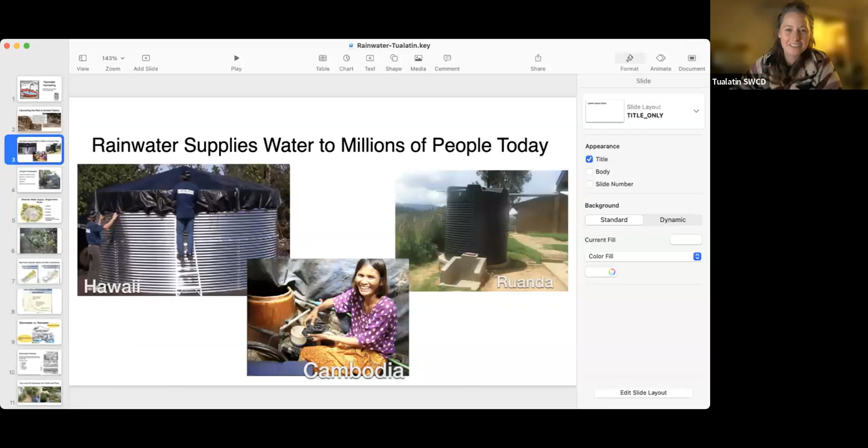I sure can. Great. So thanks for having me and thanks everybody for coming tonight. It's a great night to talk about rainwater harvesting. I can hear the rain outside my window. It's such an amazing resource that we have so much of the year in this climate.

I am a co-founder of Greywater Action. We're a nonprofit and we focus on education, trying to help people transform their homes so our homes can be managing and using all of the water flowing through our homes in a better way so we can have a more sustainable water culture. So I'm happy to talk with you tonight.

Before we start, as you probably know, harvesting rain is nothing new, maybe new to you and your community, but our ancestors all over the world have been harvesting the rain. We've just forgotten about it temporarily for the last couple hundred years. There are thousands-year-old cisterns, even in climates we consider arid, where people did utilize this resource, and especially in wetter climates too. All over the world, you're going to find these old examples of people looking to the rain as a great resource.

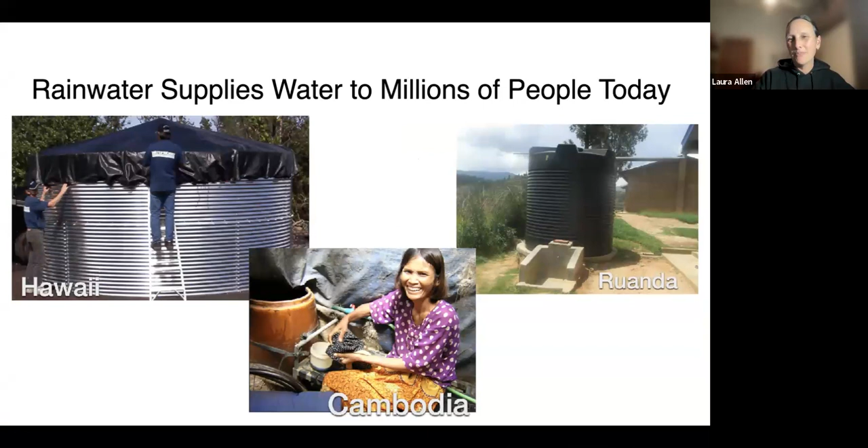Today, it is also a water supply for millions of people around the world. In this country, Hawaii is an example where so many people only have rainwater as their water supply, in addition to other countries around the world. So it's old, it's new, it's still being used today. And we're going to talk about how we can tap into this in our own homes in Oregon.

So tonight, I'm going to talk a little bit about benefits of rainwater harvesting. We're going to talk about stormwater, which is water that's flowing onto streets, and it can be a big pollution problem, but we can transform that problem into a solution. We'll also talk about rain gardens and rainwater catchment systems, going over the different components and the design that you can implement in your own home.

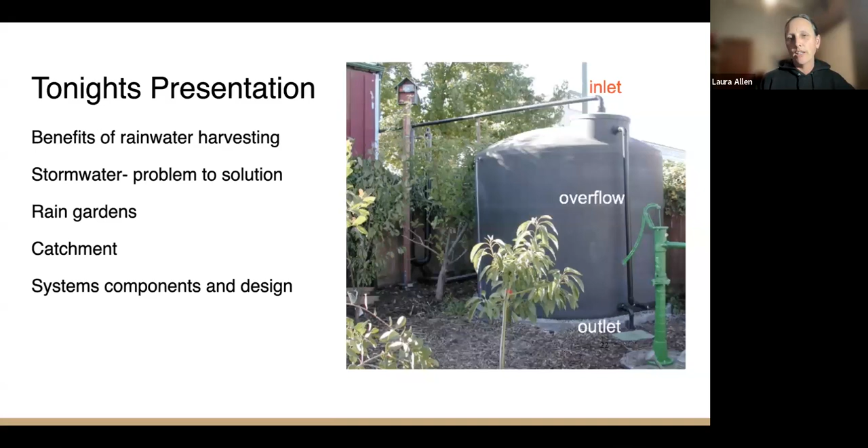Before we get into rainwater, I just want to mention it as one tool in our toolbox of transforming how we use water. It's a great resource, but it's not the only one. There are other water supplies that you may have heard about or may be interested in researching later on.

Or maybe you already use gray water, which is water we've already used in the home that can also be sent outside to be reused. And then there's other waters like black water that contains the toilet water. It's not typically safe to reuse in your own home, but at the community scale, we can recycle that water and use it for another use.

So there are lots of different sources of water that's not just potable tap water, because we have all these ways we use water where we don't actually need to be drinking it. The quality really can match the need we have, be it irrigation, toilet flushing, or other things like washing our clothes.

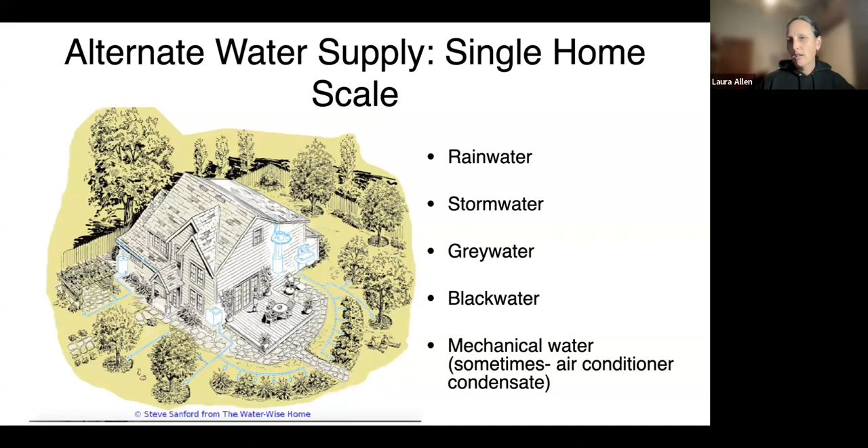And so now we'll get into the rainwater portion. Before we built our cities, when it rained, most of the rainwater soaked into the ground. Our landscapes were very spongy and they soaked up that water, and it slowly went into our creeks and rivers. But when we urbanized, that really changed how water flows through our landscape.

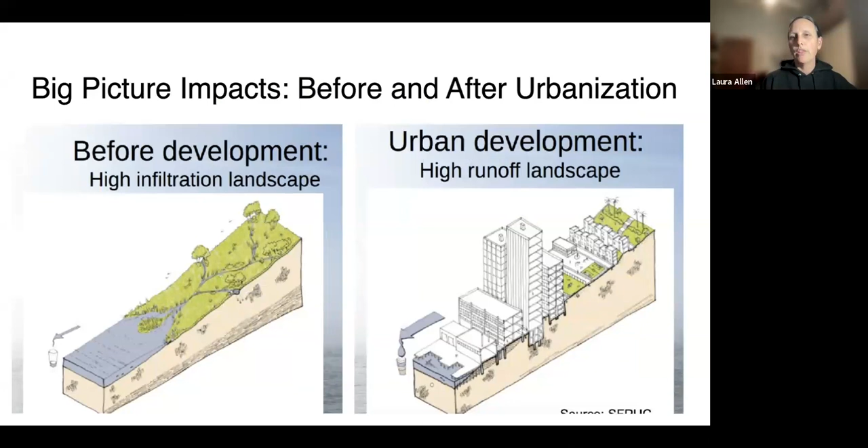When we built roads, buildings, all these things that have what we call hardscape, like anything made out of cement or a surface that doesn't soak in water, that really caused all the rainwater to run off very quickly and take all the pollution with it and send it right into our waterways. And so that was a huge change.

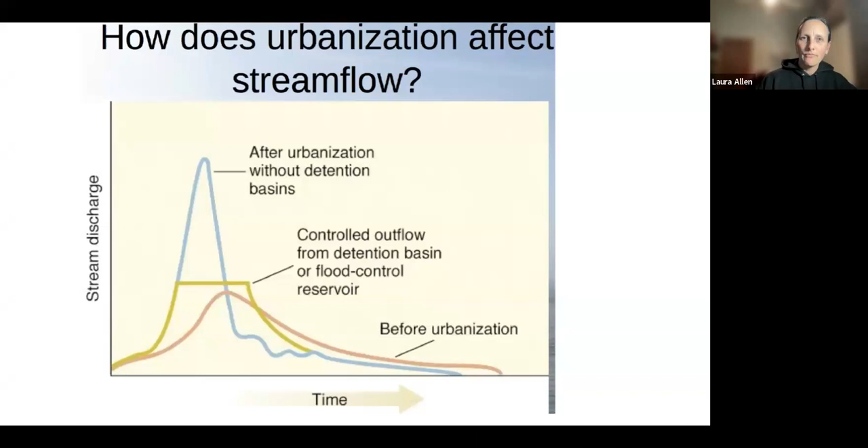Just a couple of terms if you're not familiar: stormwater and rainwater. Really, it's the same thing, water falling from the sky. We use the word stormwater when that water has hit the ground, so the quality and how you can use it is different. Stormwater comes from water running off paths, streets, parking lots, or any ground level surface. Rainwater is what's landed on our roofs that you can intercept before it gets to the ground, getting it out of your gutter or downspout into a container.

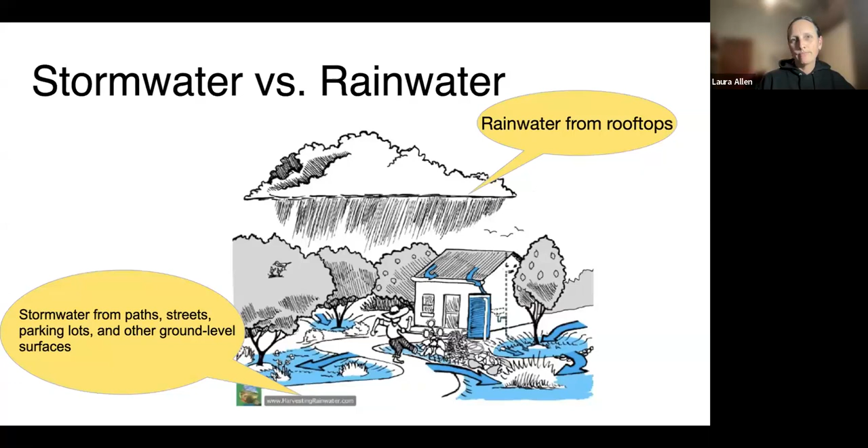Stormwater causes a lot of pollution because it washes our cities clean, washing away all the stuff we've put onto our roads and yards. There's dog poop, pesticides, fertilizers, trash, brake dust, oil slicks from the streets - a whole bunch of stuff that's really not healthy for the aquatic organisms in our waterways. Stormwater is a humongous source of pollution.

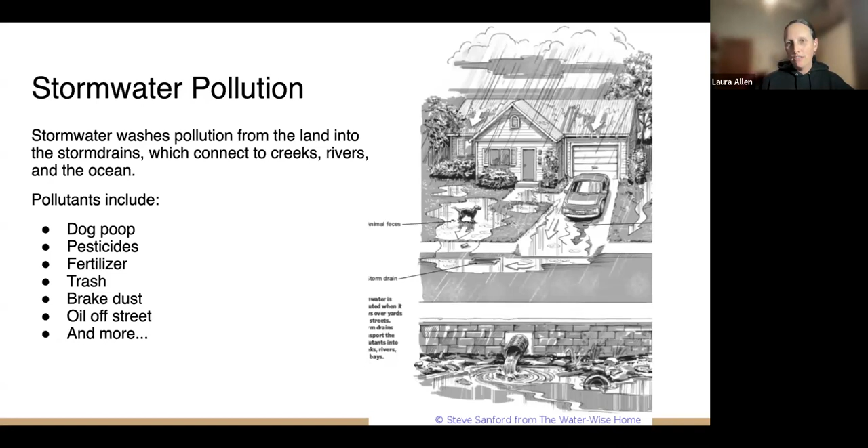So we have this double benefit: we can stop this pollution and get that water to benefit our landscapes. The big picture concept is we want to keep water where it lands, or as close to where it lands as possible. We want to slow down the flow off properties and sink it into our landscapes, starting by thinking about what we're putting on our yards.

These are really simple things you can do. Then we get a bit more involved, actually shaping the land so it's more like a bowl, so it can temporarily soak up more water. Another word for this is passive water harvesting - we're harvesting the water, but we're doing it in the ground.

In this picture, there's a house on the right with a gutter and downspout directing water to a basin, a depression in the land that's a bit lower - like a shallow bowl planted with plants. The rainwater goes there and is stored temporarily as it slowly soaks into the ground. So there's no runoff from that property, and no flooding, because there's a space dedicated to soak up that rainwater.

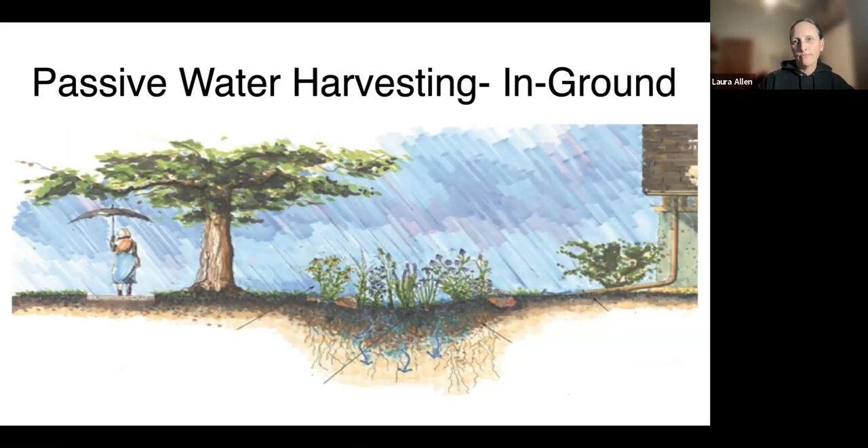We typically call these rain gardens. You've probably seen them, maybe you even have one. They're used in cities all the time now. Nowadays, if there's going to be new developments, rainwater isn't allowed to just run off anymore; you have to manage it somehow. So you'll often see rain gardens incorporated into buildings and all over the place. But if your house is already built, you most likely don't have one unless you've retrofitted your own yard. Think of a rain garden as a nice garden feature, a special planting area for the rain where you grow a lot of nice plants.

When you design a rain garden, you're designing it so it won't need irrigation. A nice benefit is that once your plants are established, you have a whole section of your yard that doesn't need irrigation because it's adapted to thrive with typical rainfall patterns. While you have this lovely landscape feature, you're also managing stormwater, cleaning the water as it flows through plants and soil and infiltrates into the ground. You're also helping your community by keeping water on your property, preventing flooding downstream. If everyone keeps rainwater on their properties, we don't get all that water going into the streets at once, causing flooding issues.

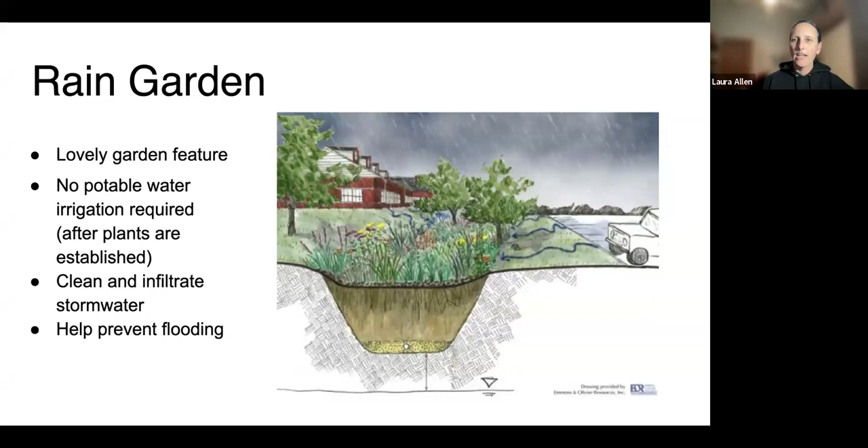Basically, how it works is you direct rainwater from your home using gutters and downspouts to a dedicated planting area. The plants you pick will have deep roots, opening up the soil and allowing infiltration. You have a place for the water to come in and a place to manage the water as it goes out. You've designed this rain garden to manage the water there. If too much water comes in and it can't soak it all up, you've created a way for the extra water to safely leave the rain garden and go somewhere else where it won't cause a problem. It's a thoughtful way of managing some of your rainwater and stormwater in your landscape.

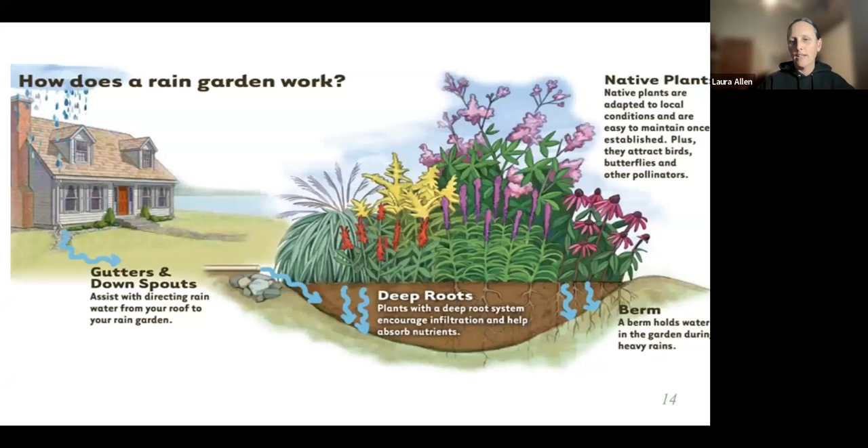The main point of a rain garden is that you're irrigating native plants. If you like to grow native plants, rain gardens are an excellent choice because they're really set up to provide water for them, and they're also preventing stormwater pollution. So you get that double benefit.

Rain gardens can be used at a bigger scale than just a home. This picture is, I believe, in Tucson, from Brad Lancaster's website. He's got some great books about harvesting rainwater, called Rainwater Harvesting for Drylands and Beyond, with a couple of books in his series. In this picture, on the left you see the landscaping being done for this small development, and on the right is the finished landscape. When it's done, you don't even necessarily know you're looking at a rain garden or seeing a way that this landscape manages rainwater. It just looks like a really nice landscape.

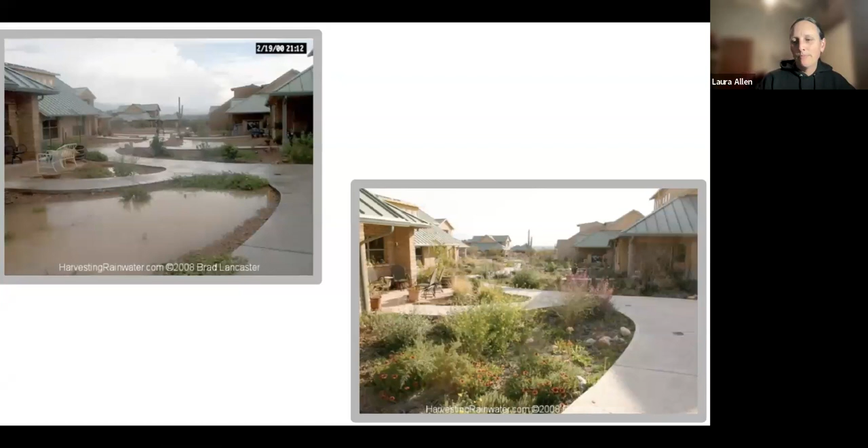Rain gardens are used in parking strips too. If you go around town wherever you live, you're most likely going to see these. They're very common now. Sometimes they aren't the most beautiful when they're in the parking strip or along the street, because cities plant them with really robust, low-maintenance plants, but they can sometimes be very lovely. These are two different pictures from parking lots and residential streets.

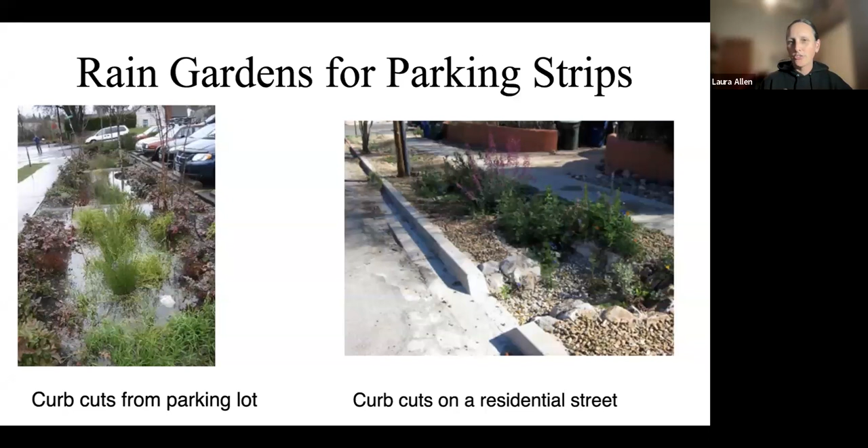At the commercial scale, stormwater isn't just used for irrigation like in rain gardens. Sometimes it's collected, filtered, and used for non-potable uses like toilet flushing. You might see examples like that, and it's a great way for a commercial site to cut back on water use. But at the residential scale, typically it's just sent to a rain garden where you're growing native plants.

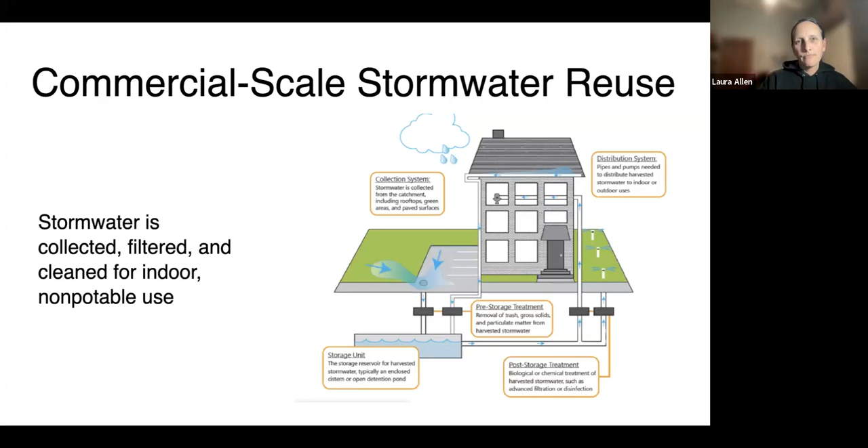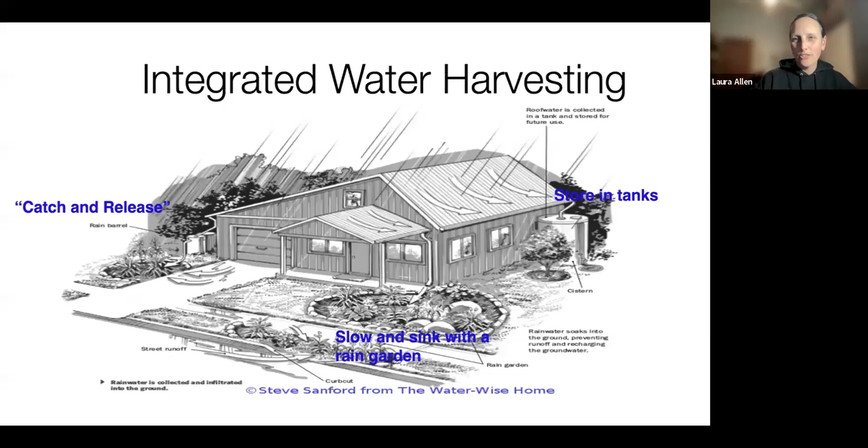So I'm going to move into talking about the storage part of rainwater. You can collect a lot of water. You usually don't have to collect all of the water from your entire roof, depending on the size of your home and access to gutters and downspouts. But you can collect a whole bunch of water. Even in 1 inch of rain on this roof, you can collect about 600 gallons. And we get a lot more than 1 inch of rain, so it's a pretty big amount.

You can store it in a lot of different ways. Barrels are a really common way, like the 55-gallon barrel. This house is showing a couple of different strategies of collecting rainwater. There's a single barrel, it's pretty small, it can go pretty much anywhere. You can paint it to match your home, put it somewhere out of the way. Really, it doesn't add a big footprint, it doesn't take up too much room.

You can also connect barrels together. So in this image, it's showing under that back deck, there are 8 barrels connected together, and that's about 400 gallons of storage capacity. That can be a really nice way to use dead space in your house. Sometimes people have a little strip behind a garage or under a deck, and you can connect these barrels together and get several hundreds of gallons of capacity in a pretty simple way. And usually it's pretty affordable.

Then you can go to a bigger tank, called a cistern or a tank. The image on the left of that house has a 3,000 gallon tank, and that's near the house. It doesn't have to be. I have a 3,000 gallon tank at my house, and it's about maybe 30 feet off the house. So I'll talk a little bit later about how you can position the tank where it's not right next to your house, but that depends on how big your yard is. That could be a giant tank, or maybe that could fit nicely into your landscape, depending on how much room you have.

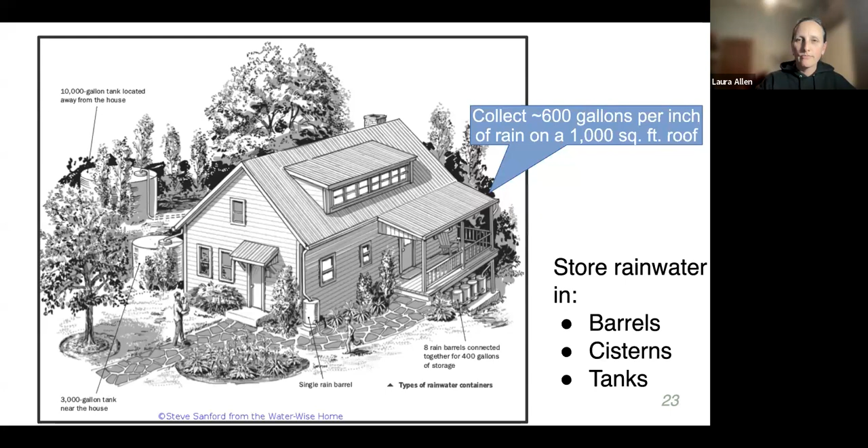So at the residential scale, the common uses for rainwater—usually people start with using it for outdoor irrigation. It can be really simple to do that, call it low tech. You're just collecting the water, you're not going to drink it, so the quality is not super important. You use some basic screens to keep out mosquitoes and keep out leaves and debris, and then you can just send it right into your landscape. It can be gravity flow, really simple.

If you have a bigger system and maybe a bigger yard, you might want to do a drip irrigation system with your rainwater, because it can be time consuming to use up the water if you're out there with the hose. And these rain systems don't have a lot of pressure. So if you imagine hand watering with the hose, it's probably going to take like 2 to 4 times longer if you're using a low pressure situation. So depending on the size of your yard, you might want to streamline that a little bit.

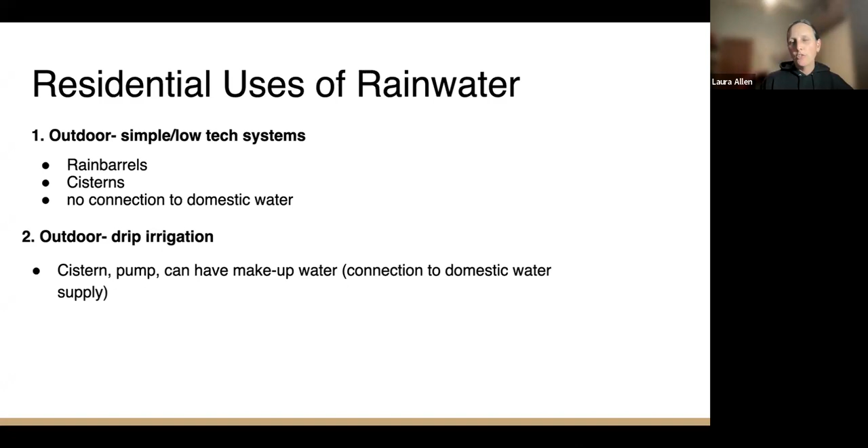So you can set up a drip irrigation system with your rainwater. You can sometimes have it work with gravity if your setup allows for that. Oftentimes you might need to have a pump or something to pressurize that water—that's going to add a complication, but it is definitely a possibility. And sometimes systems will have what's called makeup water, or an additional supply of water going into the system. Those are going to be a little more complicated, but they can really help with big landscapes that are using rainwater for irrigation.

And then there's the indoor use of rainwater. The most common indoor use is non-potable, so sources like toilets and laundry, where the water isn't touching people and isn't drunk or splashing like in the shower. We're not drinking it per se, but it definitely can get in people's mouths in the shower.

So you don't want non-potable water in a shower, but in toilets and laundry it's totally safe. Rainwater is relatively clean, but then it lands on the roof, so there are some ways it can become dirty. That's a way people cut back on their water use.

And then there's also whole house systems, like I mentioned before, where the rainwater is the water supply for the home. Those systems are going to have other components like a pump for sure, disinfectant and filtration. And if there's another water supply, they might be connected in a safe way to make sure there's no crossing over of the rainwater and the other water supply. So that's kind of the range.

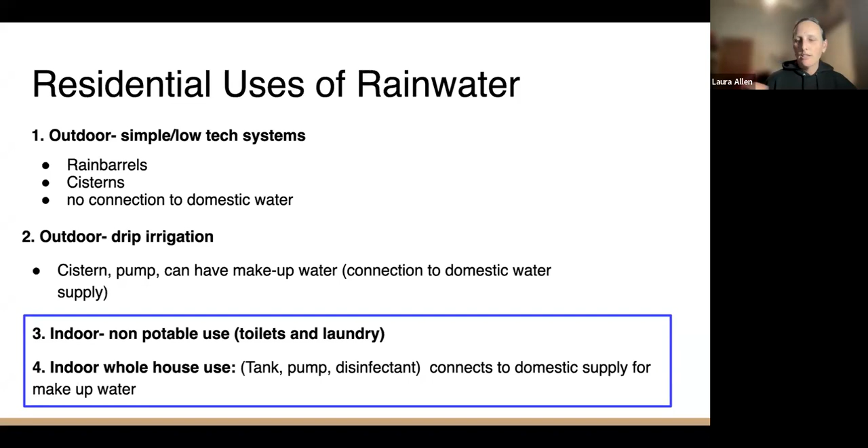Since I don't know what all of you are thinking about or interested in, I'm going to mention numbers 3 and 4 briefly, but I'm going to focus on numbers 1 and 2, because that's really the most common in Oregon, since most people do have other water supplies.

But if you're really trying to know how much water you're saving, or if you're working with a pretty small roof and want to make sure it's going to fill up the tank you're looking into, or if this is an important part of your water supply, you're going to want to figure out how much water your roof can collect.

It's pretty simple. You just have to know how wide the building is and how long it is, so you basically find the area of the building. And if you have a home that's not like a rectangle or a square but more of an L shape, you just add these different rectangles or squares together.

The example I want to share is very simple. This home is 30 feet wide and 80 feet long. You multiply that together and you get 2,400 square feet, and that is the area of the roof.

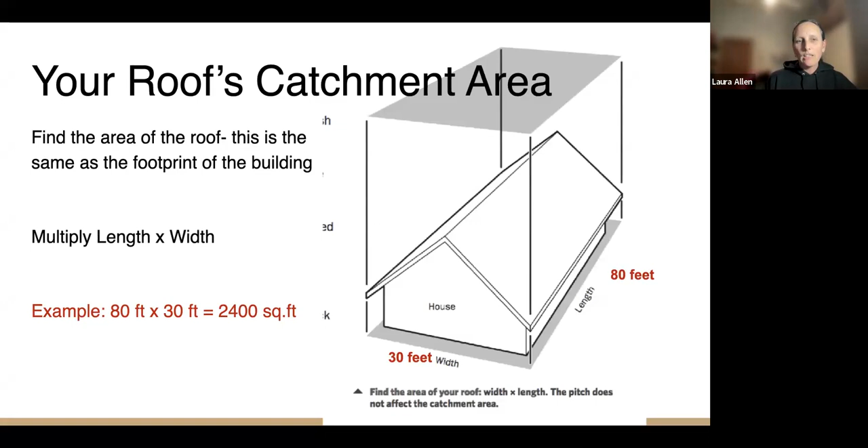You might notice that this roof is pitched, not flat, and that's totally fine. That doesn't impact the amount of water collected on this roof. Just imagine the rain falling as a sheet - it's going to hit the upper part of the roof first, and the rain further out to the edges will hit later, but the same amount of water is going to hit that roof regardless of how steep it's pitched. So you just multiply length times width, and now you have the area of your structure.

So then that's your catchment area. Then you need to multiply it by the rainfall. Usually we do average rainfall, unless this is your only water supply, in which case you might want to consider the worst case scenario drought. You'd do this differently, but typically we do it by average rainfall wherever you live.

And then you multiply it by a coefficient, 0.56, which converts rainfall in inches into gallons. It also assumes an efficiency - it assumes not every drop of rain is going to be collected. Some of it's going to blow away, not all go through the system. So that gives you a more realistic number of what you're going to collect.

So for example, that 2,400 square foot roof - I live in Eugene, 45 inches is our average. I'm going to use that with the 0.56 coefficient. When I multiply all that together, I get 60,480 gallons per year. So it's quite a big number.

I don't have enough resources to purchase a tank that big, nor need to, or space to. So I have a 3,000 gallon tank, which is totally sufficient for the needs I'm using for my rainwater system - it's supplemental irrigation for a whole big section of my yard, and it fits all the parameters of my landscape. So it's kind of nice to do this number just to see how much potential there is, and then you work with the constraints you have based on the size of your home, your budget, the size of your yard, and all those things.

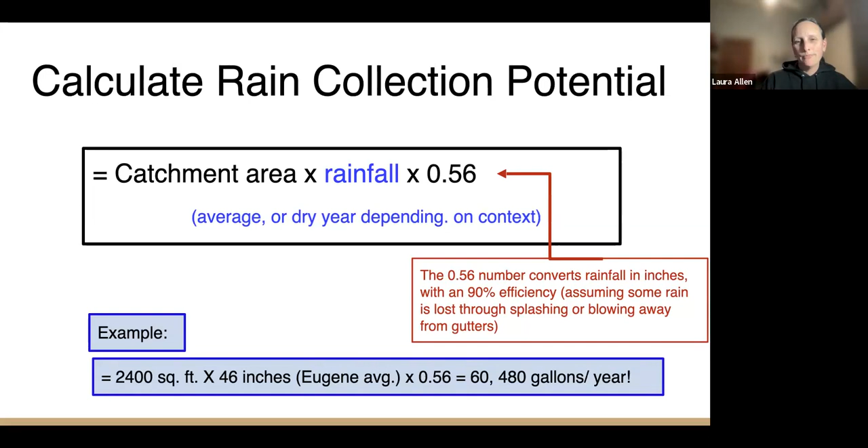I'm going to talk about codes and regulations. I just want to mention that sometimes when I table or go to events, people say, I heard rainwater's illegal in Oregon. I don't know if any of you have heard this, but it's definitely gotten out there into people's minds that rainwater might not be legal to use in Oregon. And that's actually completely false.

But there was this one incident of a man who basically built a gigantic pond without a permit, and it did fill up with rainwater, but he got in trouble for building this gigantic pond without a permit, though the headlines would lead people to think otherwise. So I just want to bring that up because if you've heard that, just know it's not true. This is what he did with no permit, and that's really different than collecting rainwater from your roof.

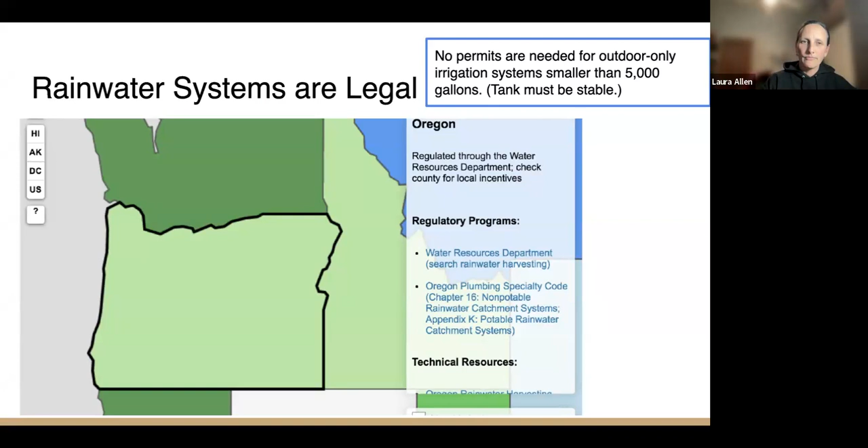So we'll start with the simplest, the rain barrels. I'm going to go into how you would install this really simply and what to look into. With the rain barrel, they're about 50 gallons. You can connect them together, like I mentioned before. You can just connect them all at the bottom and then have one outlet so they all fill and empty together, kind of like batteries connected together.

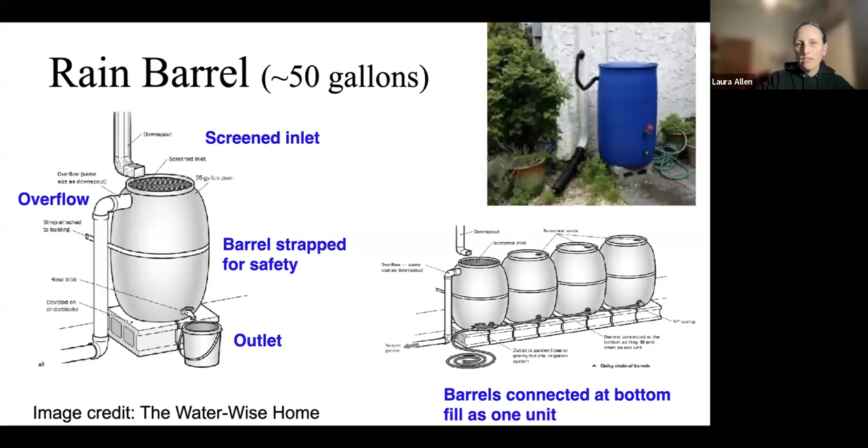You're going to have an inlet into your system, and you always want to screen it. Anytime you're going to have water standing around, you don't want mosquitoes to get in, so you'll have screens to prevent mosquitoes from going in. You're going to have an overflow. If you're having these barrels and elevating them at all, you want to strap it down for safety. Even though 50 gallons is not that big, it is quite heavy, so you wouldn't want this to fall on somebody, so you always want to make sure it's stabilized. And then you have an outlet where you collect the water. That's a basic way you do it.

Here's a picture. Oftentimes the barrels are blue. You can often find repurposed ones. In this picture, these are olive barrels, and the blue ones just need to be food grade. So depending on what you get, you might have different colored barrels - there's black ones, orange ones, blue ones. Sometimes you can get them quite affordably, though since it's a little more popular, it's harder to get these barrels now. You used to be able to get them for free or really, really cheap, and now that's a lot harder to do because more people want them.

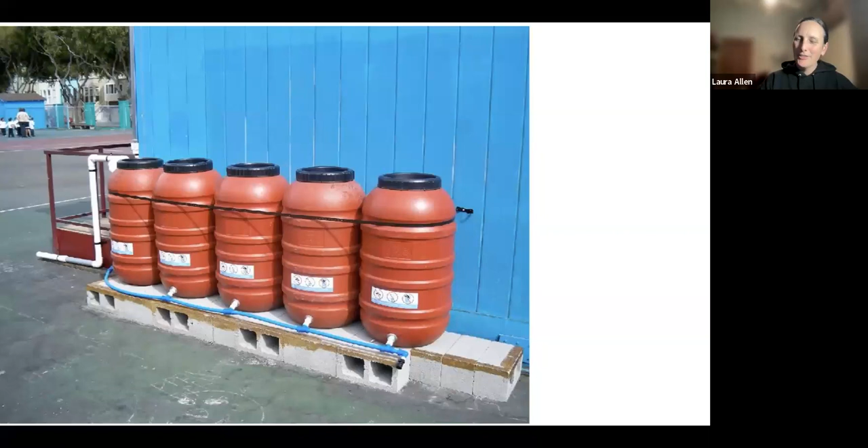So here's the orange barrels. There's a company - I'm going to have a link to it later, and you'll get all the links in the resources - but they sell little adapters that work for these orange barrels, really standard adapters to get into it.

Here's a system that this person put in. It's 5 of those barrels, so that's about 250 gallons. You can see the diverter just drilled into the downspout. There's a screen on top, so when the water comes off the roof, it screens out leaves and debris, and then the diverter comes right into the downspout. The really nice thing about this kind of diverter is it's the inlet and the overflow - so if the barrels are all full, the water just continues on how it used to go. You don't have to make a special overflow for your system.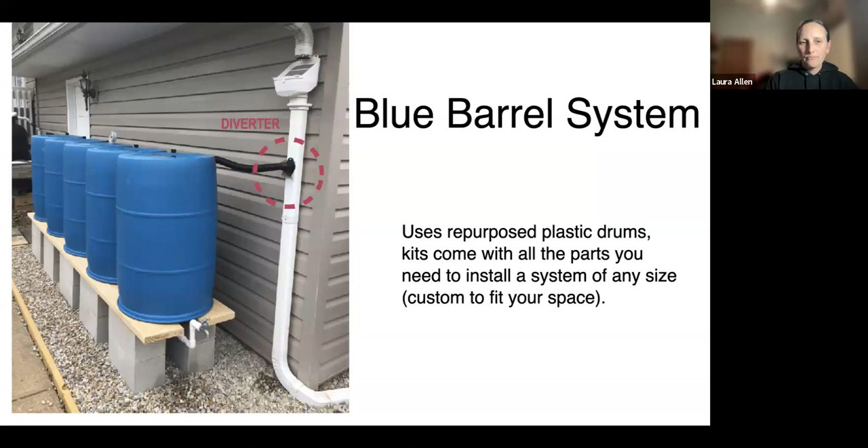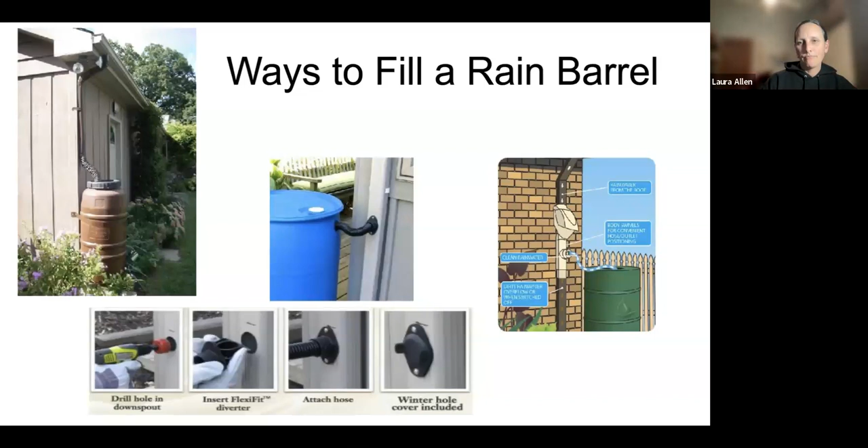So there's several ways to fill the rain barrel, like the picture on the left, it's just going right into the top of it. This is a close-up of what you saw in the last picture. This one is really nice because, again, you don't have to have the overflow - it's the inlet and overflow all together. You just drill a little hole into your downspout and then put that on there. It's probably the easiest one, it's flexible, and you can just move that flexi tube into your rain barrel. It's not too expensive either.

Anytime you have water, you don't want mosquitoes. If you're using a larger system like a tank, sometimes these tanks fill from the top and you want to make sure you have some kind of screen. They often come with it, but if you're offered or find some kind of non-standard container - people adapt a lot of things to collect rainwater - just make sure you're thinking about screens to keep out leaves and keep out mosquitoes.

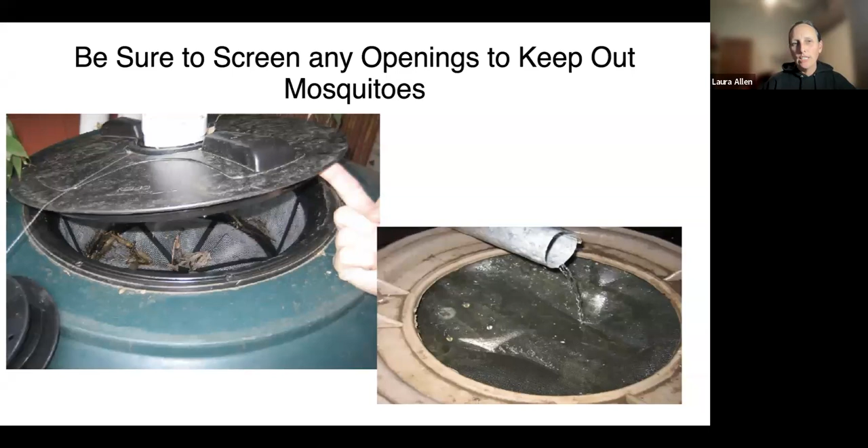These numbers might make you think, wow, maybe one rain barrel is not quite enough for me, maybe I want more. Rain barrels can be a really great educational system - they're pretty easy to put in, and they can give you awareness of how much potential you have with this resource because they fill up very quickly. And then you use them really quickly too, so they can really show you how much water your landscape needs. I think it's beneficial as a tool, but if your goal is to cut back on water use, then you're going to want to do some more than just a rain barrel.

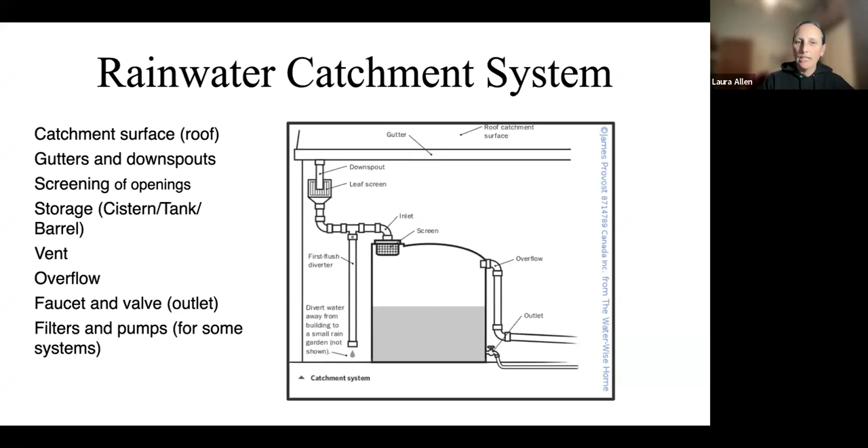So here's some pictures of barrels. The top left, that's a 1,200 gallon barrel. The green round barrels are the most affordable option typically when you get into the tanks, and they're pretty common. So that's probably what you're going to be getting if you're going into a bigger size, like more than 300 gallons. Those green barrels can go from a couple hundred gallons up to several thousand gallons, so there are lots of different size options.

The picture on the right, these are more narrow. Sometimes people have a narrow strip along the home, so they want to connect a couple of narrow barrels or narrow tanks together. Each one of those is 205 gallons, so they can connect several together and get a pretty big amount of water in that narrow strip.

And then just for size, you can see that 10,000 gallon tank. This is on a rural property, so space is not really an issue. You can see there's a person standing in front and a person on the ladder, so that's a pretty big tank. Those are usually made out of metal, though not always.

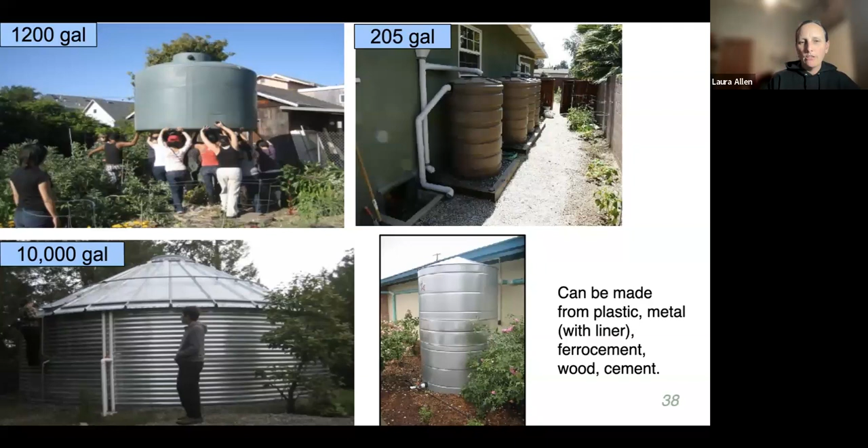So when you have your tank, you need to get the water from the house, the roof, to the tank. There's two ways to do it - I'll call one a wet system and the other a dry system. In a wet system, the water goes through your gutter downspout into a pipe, and that pipe can come all the way to the ground, go across the ground, and then go back up and into your tank.

As long as the top of the tank where you come in is lower than the gutter where you're going down from, as long as there's a difference, the water is going to flow through it. But there'll always be water in the bottom - that's why it's called a wet system. So if you get heavy freezes, if that's not buried, you might need a drain in that system. But that's a really nice way to get the tank away from your house, so you're not stuck with the tank right by the house or really close to it.

Like in the bottom image, that's a dry system. You can see how the water flows through that pipe and drops into the tank, and there won't be any standing water in that pipe. That works really well if your tank is right next to your house, or sometimes people have a little cover awning or something going over, and they can run the pipe along with it. But it's often impractical, and you really just go down to the ground, across the ground, and back up. That way you can have a lot more flexibility of where you locate that tank.

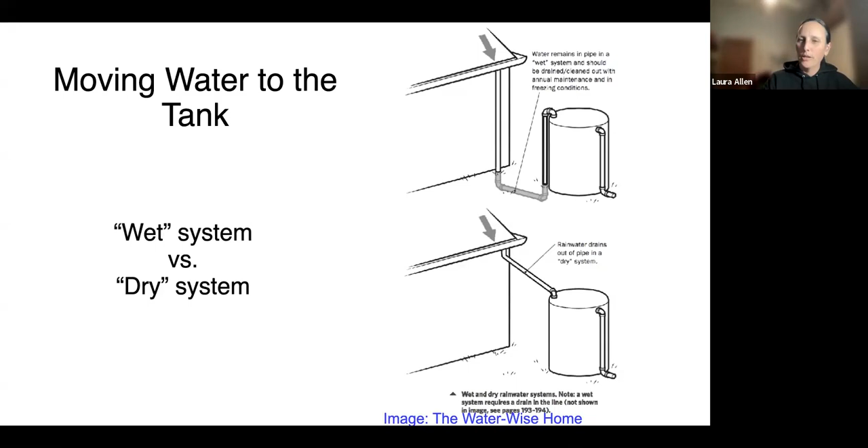So here's a couple of pictures of the parts. There's that screen. With this one, you can see an example of crossing over - maybe there's hardscape right along the house, so you can cross over an arbor or something, or you could cut a little strip out of your hardscape if you needed to, and then go along the ground up into the tank.

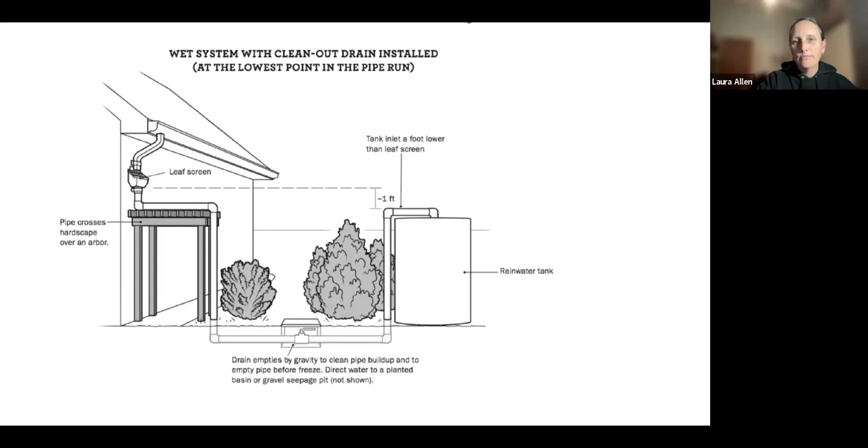So just a little more on keeping the rainwater clean. It's very clean when it comes through the sky, and then it lands on your roof and flows through all the different parts of your roof, your gutters, and your downspout. So you want to start by keeping the screen right at the downspout - that's going to keep away the big stuff. And then there's a thing called a first flush - I'll show you that in the next slide.

That's getting out the dirtiest water, the water that's washing off the roof. If you imagine all summer long, there's dust and debris getting on the roof, bird poop, and then that first rain is basically washing your roof - that's the dirtiest water. So you don't want to send that right into your tank. You want to divert that water away and then fill up your tank after the roof has already been washed.

You also want to make sure your tanks don't let UV sunlight through, because you don't want algae to grow in your tank. So they're typically a dark color, or if you happen to get a lighter colored tank, you can paint it just to make sure that UV light isn't getting in and causing algae to grow.

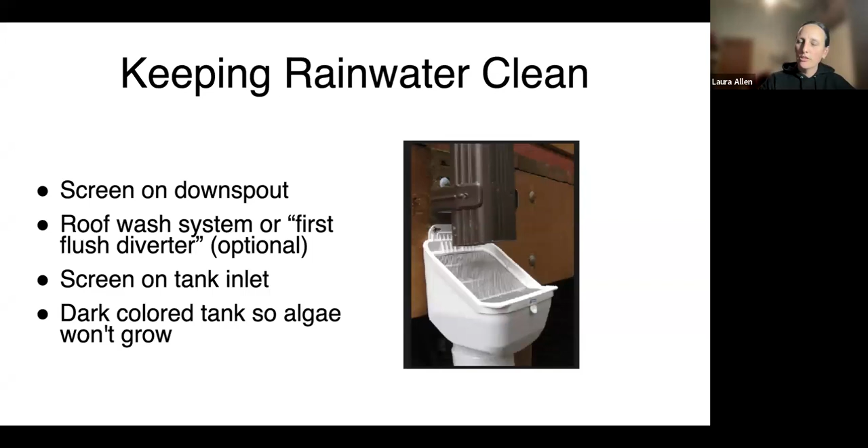So there's a picture of that leaf screen. You're going from the gutter to your leaf screen. There's various options. You've probably seen those really pretty rain chains. You can incorporate those into your rain system. There's different ways to do it.

So the first flush diverter, this is where you don't want to collect that dirty washing of the roof. If your system is pretty small, you don't really need it. You can just physically not connect your pipe the first time and send it into the tank after. Or if you get consistent rain all along, it's kind of optional. But in our climate, it is nice to have that to divert the first flush away.

Though the first flush diverter does require a little bit of maintenance. It does have to be cleaned. So if you're not going to really clean out that diverter, it's better just to skip it altogether, because it won't work unless it's cleaned out on occasion.

So how it works is the water is flowing. We'll look at the middle picture as well as the one on the right—these are just two variations of where you locate it. Basically the water flows and fills up that big tube along the house, or the big tube in front of the tank. Inside that, there is a floating ball. When it gets to the top, it plugs up right in that T, so the cleaner rainwater flows and fills the tank.

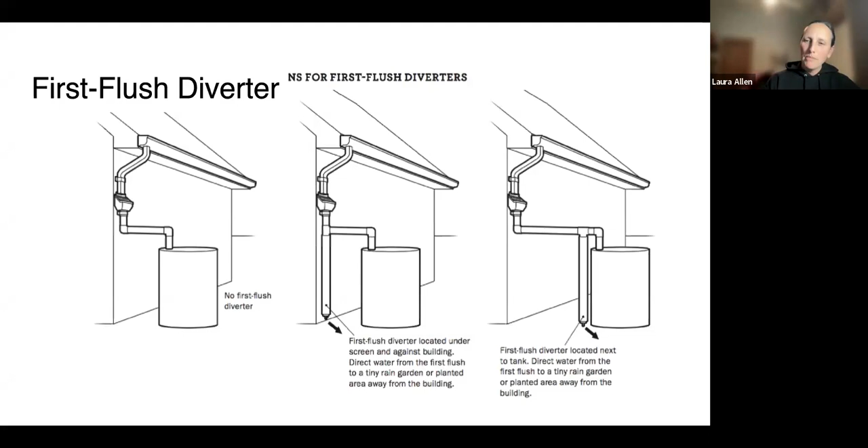So we've collected the rainwater and now we're going to use it. You can use it with a hose, watering can, or a gravity fed drip system. Usually you'll do that for a larger system.

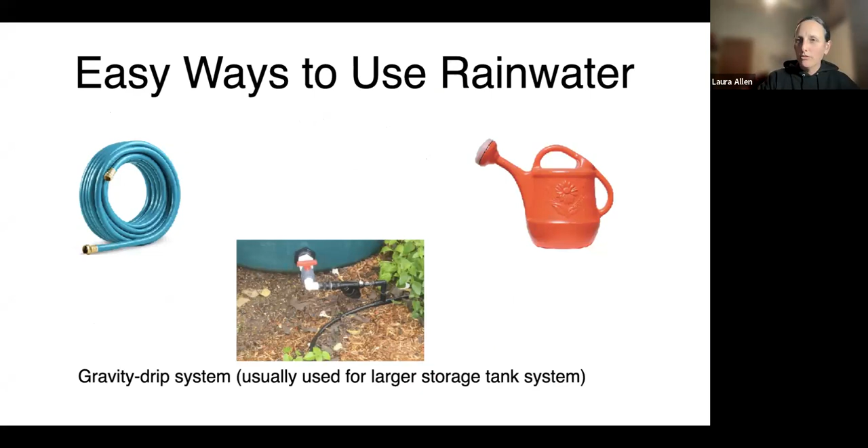And if you do drip, there's several options. You need to make sure you're using a low pressure drip system, because the rainwater tank, even though it's pretty tall, there is some pressure—but not the same amount as a tap or regular city water pressure. So you have to use drip irrigation components that can work with very low pressure, or go into a more complex system with a pump, which would then need a permit and could use any type of drip irrigation.

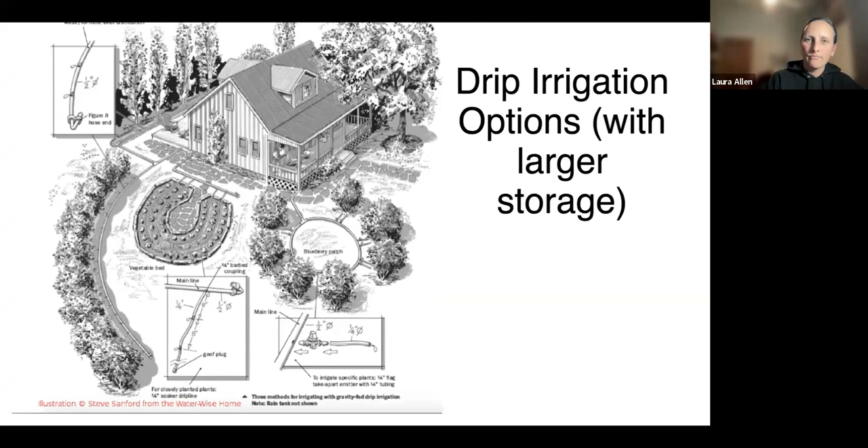Your overflow is going to be the same size as your inlet, so when your rain tank fills, water can safely flow out. You want to send your overflow somewhere like a rain garden or a planted area, somewhere that can soak up the extra water flowing through your rain system.

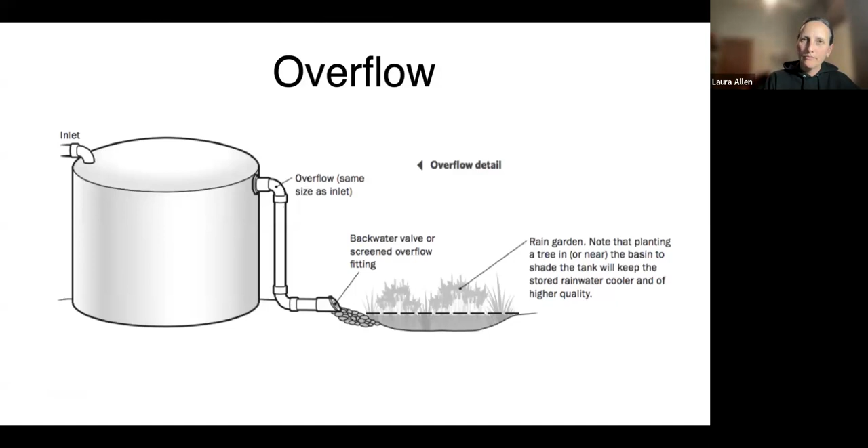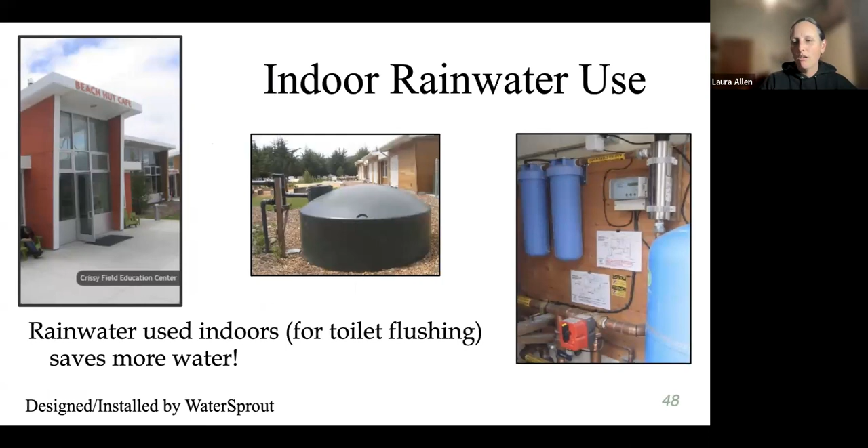Indoor, all of it's going to be the same until you get to the filtration. There's always going to be a pump and a filter, and you can use it for toilet flushing. There are so many examples of indoor rainwater systems all around Oregon, California, all over the country—just a lot of them.

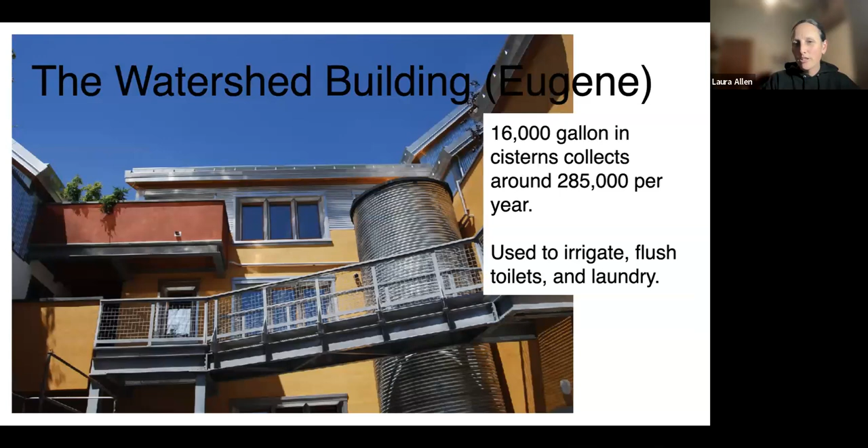Here's one where I live. It's a big indoor collection tank, used for irrigation and toilet flushing as well as laundry.

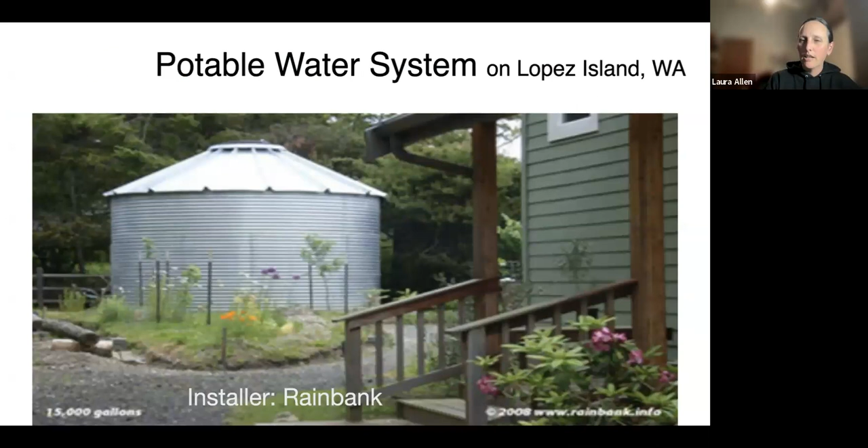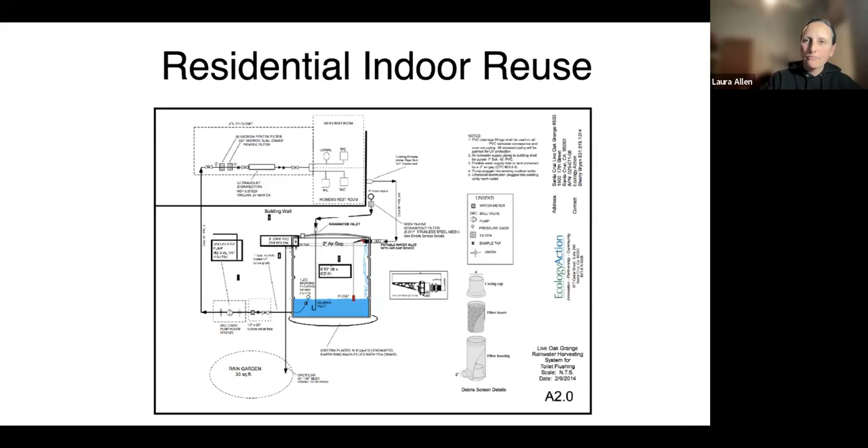If you're doing an indoor system, you're going to need to get a permit, like I mentioned before, and you'll have to have drawings and a designer. So it is a little more complex, but you can definitely do it. There's examples all over, you would just need to provide the permitting agency a little bit more info. This is an example from a permit for an indoor rainwater system. And again, rainwater is used in big buildings, there's so many different examples of rainwater being used all over the place.

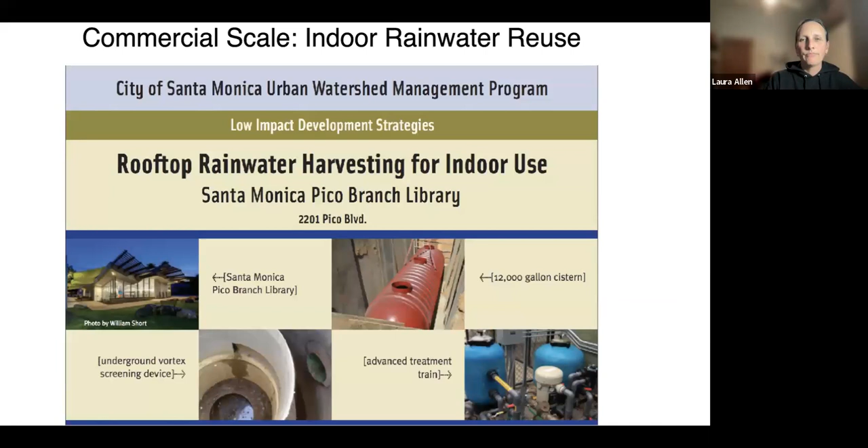For cost, the lowest cost options are going to be repurposed barrels, do-it-yourself projects. When you're purchasing a tank, you're looking at 50 cents to $1 per gallon, about. That'll get you in the ballpark of how much you're going to spend. And if you're hiring somebody for a more complex system, the dollars per gallon goes up to about $1.50, $2, $3 per gallon. So there's a huge range of costs, and you can pick a type of rainwater system that's going to match your budget.

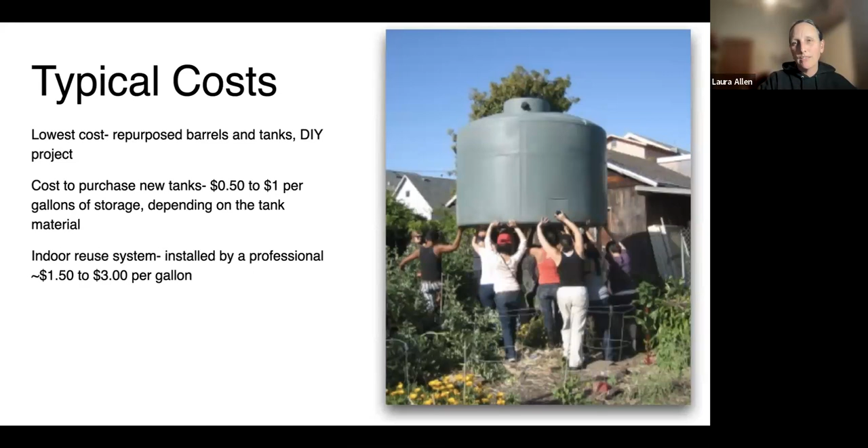So wrapping up, and I know we can get to questions in just a sec. When you're thinking about using rainwater, the first question to ask yourself is, what are you going to use the water for? If you want to grow native plants or just have a lovely native landscape, a rain garden is going to work really well for you. If you want to use rainwater for a vegetable garden or plants that are going to need irrigation all summer long, that's when you want to think about the tank, storing up the rainwater for later on. So really think about what you're going to grow and what type of system is going to match that.

Then think about where you can locate your system. Look at your home, see where the gutters and downspouts go. You can always change them, but that's a lot of extra work, so if you can work with your existing house, that's going to make your system a lot easier. Look at the different options of where the downspouts are, or think about whether you could redirect the downspout. You can pipe it along your house, turn a corner, make some small adjustments relatively easily. But think about where the tank could go, and also where you need to use the water. How do you get the water to the part of your landscape where you need it?

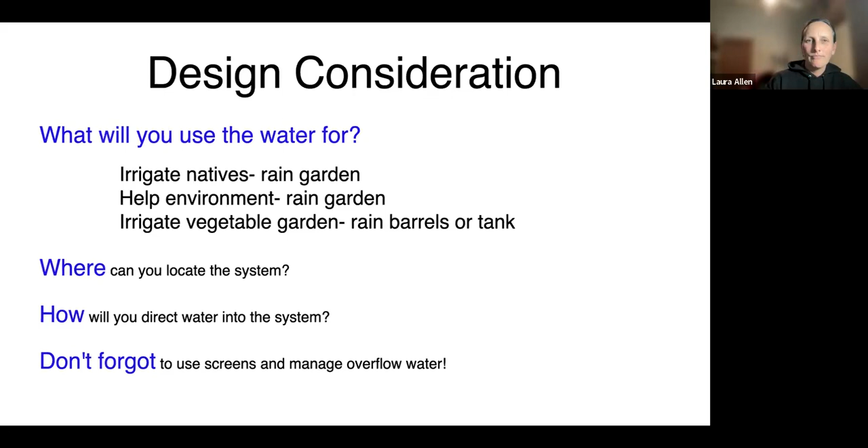Think about how you're going to direct the water into your system. Can you use a dry system, like going straight into your tank, or a wet system where you go along the ground? Or if it's a rain garden, how can you have that pipe connect your downspout into the rain garden? And don't forget to use your screens and manage the overflow of the water, where it's going to go after it fills up whatever you've created. So I'll stop at the resource page, and you're going to get an email with all that.